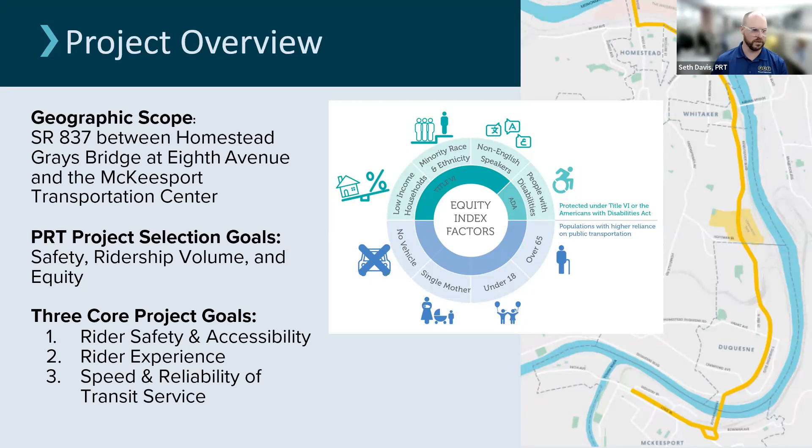So why are we all here to invest in transit on PA Route 837? Our NEXTransit long-range plan was adopted by the board in fall of 2021 and included 17 priority corridors. H2M is the first corridor planning project being implemented from a planning and future implementation perspective.

These proposed improvements will improve access to the downtown Pittsburgh to Oakland bus rapid transit corridor, which is coming online and beginning construction this fall. PA 837 also experiences one of the highest service delays in the Mon Valley, with over 7,500 transit riders through 8th Avenue in Homestead, demonstrating a high need and demand that already exists. This project will continue to support revitalization and development, not only on the 8th Avenue Business District, but across the corridor.

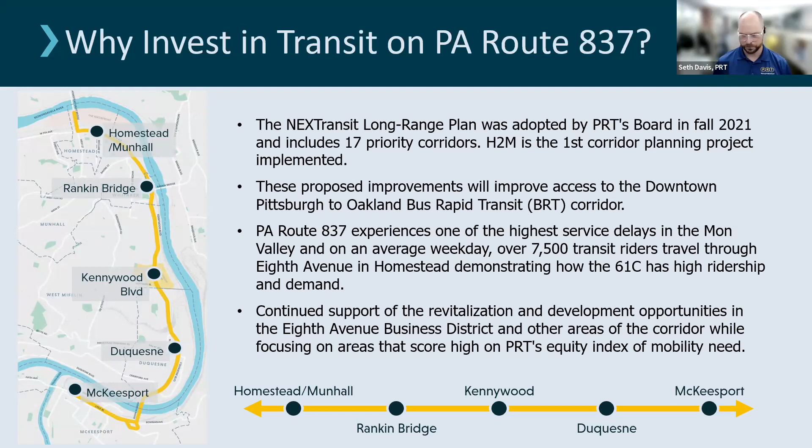So how did we get here? In fall of 2021, this was launched as an internal PRT project, with initial engagement around existing conditions and analysis. We brought that forward to a couple of public workshops to gain feedback on the corridor and desired improvements. Following that round of public engagement, we brought a consultant team on board to support the remaining stages of the project. In fall of 2022, there was significant data collection, modeling, and other elements, with initial corridor concepts developed.

So our approach to corridor planning: rider safety and accessibility, making it easier and safer for folks to access transit stops; improving our riders' experience, ensuring facilities in adjacent areas are more comfortable and attractive; and focusing on improving the speed and reliability of transit service.

This is a cycle that goes through an internal committee, works with our project partners, and comes to you as the public, as well as government officials, community members, and stakeholders, to refine this process.

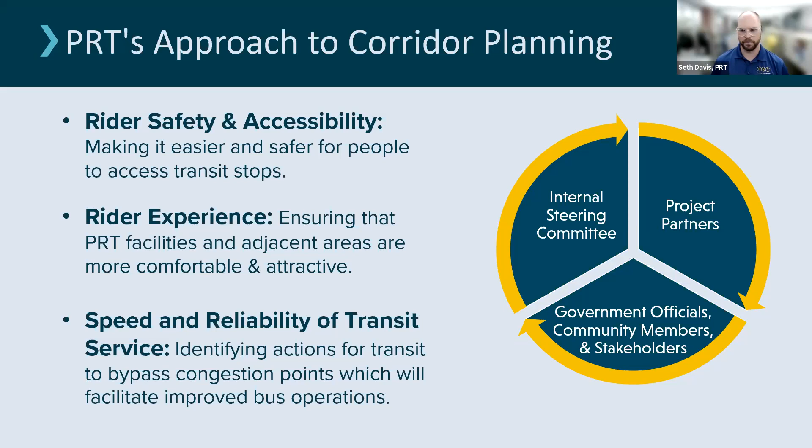There's been a long list of stakeholder engagement to date, starting with partner and community stakeholders back in fall of 2021, and several rounds of engagement internally, externally, with project partners, with community stakeholders, and most recently coming back to the project partners again. When we talk project partners, that's Allegheny County, PennDOT District 11, and the Southwestern Pennsylvania Commission, the Metropolitan Planning Organization for the region.

Just a quick touch on what happened previously in public meeting round 1, for those who participated in that round of public outreach. Some elements you'll see today will be familiar from that process, but the team has been working in the background with those who control the road segments in the corridor, to ensure any proposals you'll see today will be implementable and work with any changes they're making along the corridor.

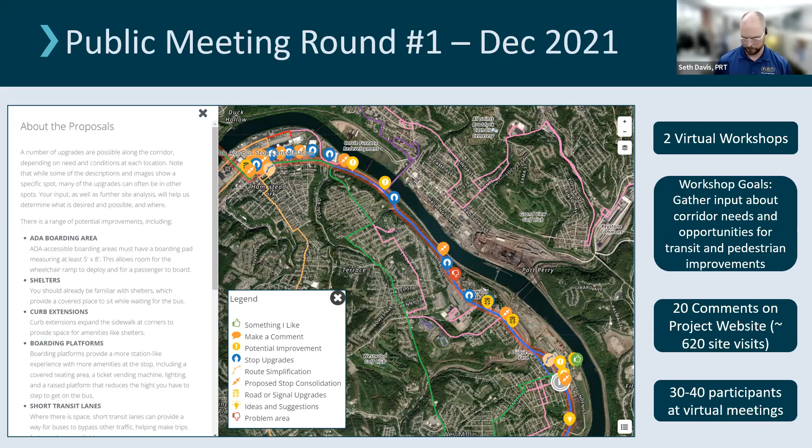As we step forward into some of the existing conditions and background analysis, we're also going to touch on opportunities for bus stop balancing in the corridor.

Existing transit in the H2M corridor area includes 5 key bus routes: the 61C, the P7, the 59, the 52L, and the 53L. There are also several routes that move through the waterfront area. While changes through this study aren't part of that scope, we know it's an important factor and destination for folks who may be using this corridor.

Typically there are 200 buses versus a 15,000 average daily traffic count on this corridor on 8th Avenue, so at any time about 10% of the people moving through the 8th Avenue business district are traveling via bus.

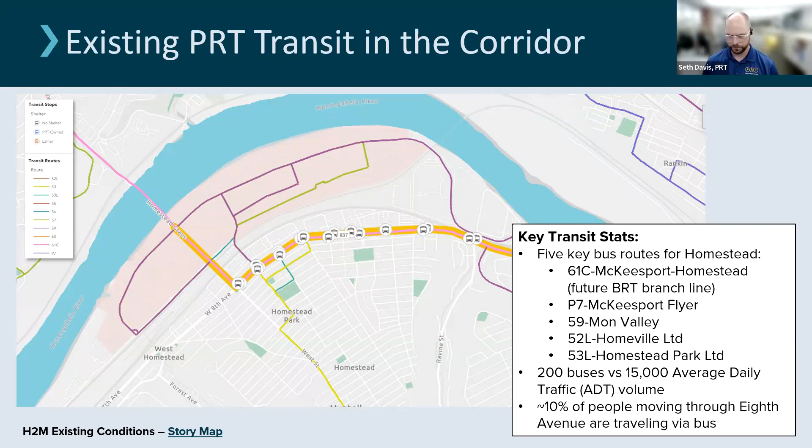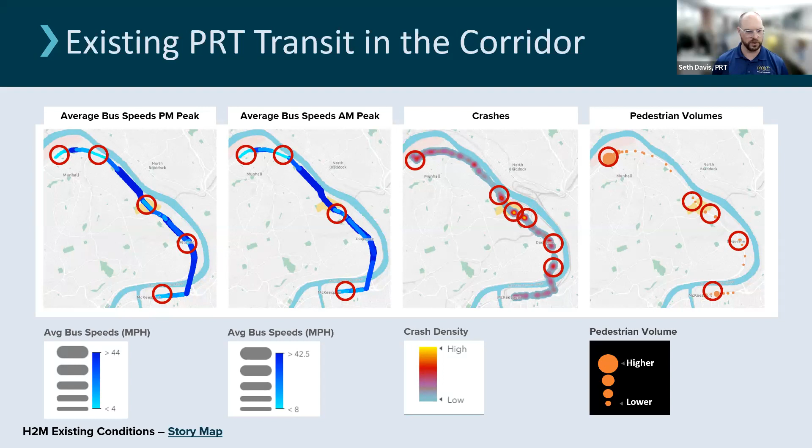Some of the existing conditions analysis the team talked about earlier is shown on screen here. We're looking at average bus speeds in the PM and AM peaks, and crashes and pedestrian volumes. There's a link on the site that shows this previous analysis, but what the team really started to see is several focus areas where speed is consistently impacted, while also seeing crashes and high pedestrian volumes—areas we want to dig into through the work of this study.

So just to touch on PRT's bus stop balancing process, why does PRT have a stop consolidation or balancing process? The overall goal is to balance the number of stops to improve a few different factors: on-time performance, reliability of the service, and the ability to focus rider amenities and overall experience around specific areas.

Through a multi-phased effort, typically we have a minimum of 600 feet between stops, and the corridor in some places shows we're hovering around 500 feet or even closer in certain areas. Several factors are included in terms of stop utilization, slope and topographical conditions, proximity to key community anchors. There are different guidelines on the screen here, and the table at the bottom has the breakdown of spacing across our different route conditions. That's how this team has applied those metrics to this corridor.

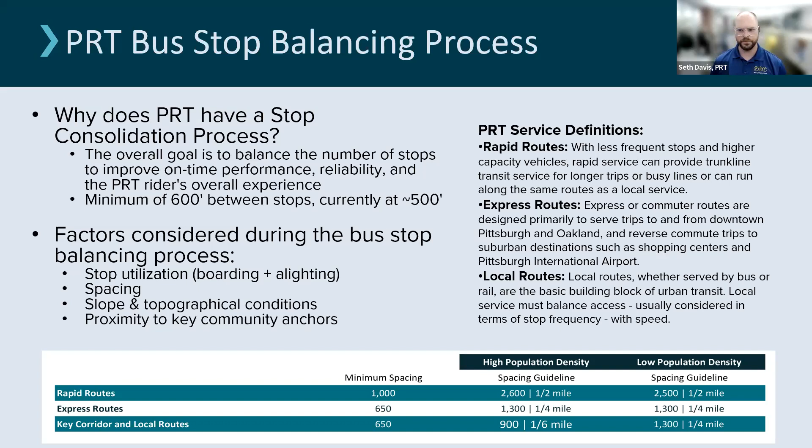But the importance we are bringing forward is to better serve riders' needs. There will be shelters, additional amenities, and recommendations for closing sidewalk gaps where possible, working with our stakeholders in the communities, as well as our project partners, to close those gaps before any of these consolidation or balancing recommendations are put forward.

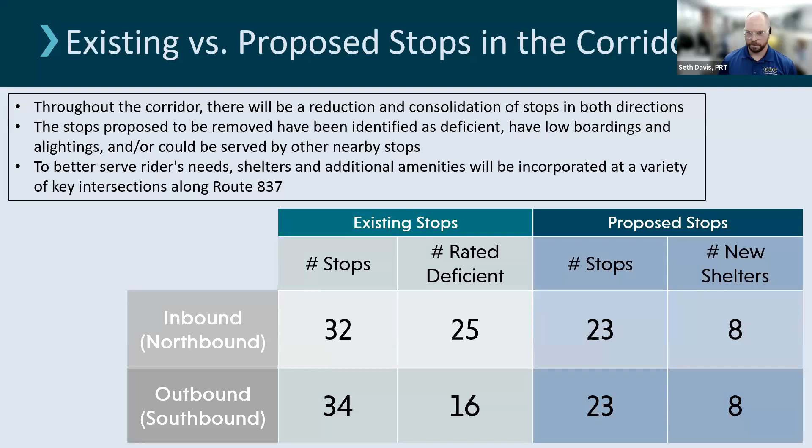Stepping forward, the area where you'll see some of the most bus stop balancing recommendations is the Homestead and Munhall area. 8th Avenue is relatively well connected from a sidewalk network. We know it's not perfect everywhere, but in Homestead and Munhall there's a pretty good sidewalk infrastructure and network before you start heading up the hill. The walk shed analysis shows good connectivity, so there are recommendations here to bring the stops into PRT's guidelines.

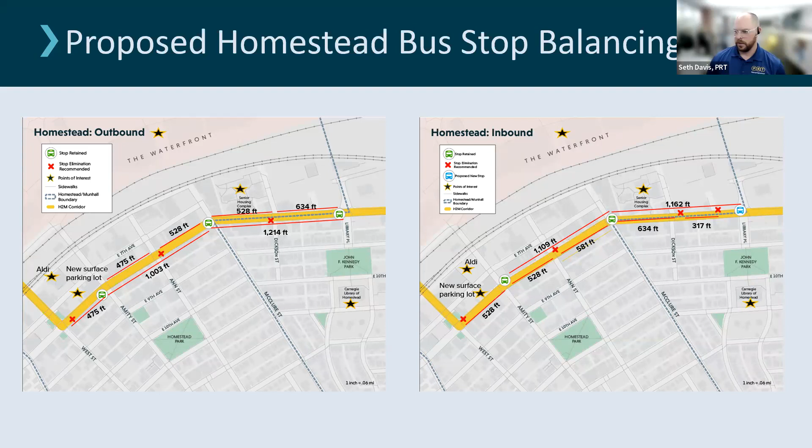But with those changes, we also want to bring forward amenity improvements in many of those locations. So if a few stop pairs are being removed and consolidated towards nearby adjacent stops, the largest shift to the nearest stop may be about 630 feet, but there is a closer stop in the other direction.

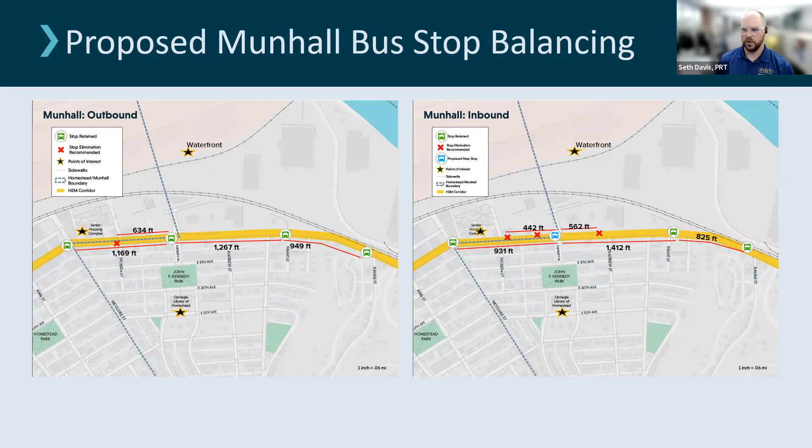Similarly in Munhall, there's a lot of crossover here with where Homestead and Munhall touch together, and similar recommendations apply, with the largest change again being only about 630 feet.

There's no recommended balancing right now in McKeesport other than a small adjustment, and we'll touch on why things aren't changing on Lysle Boulevard more significantly later in the presentation. Just want to highlight there is one stop location being proposed to have a minor adjustment, and we'll get into those details going forward.

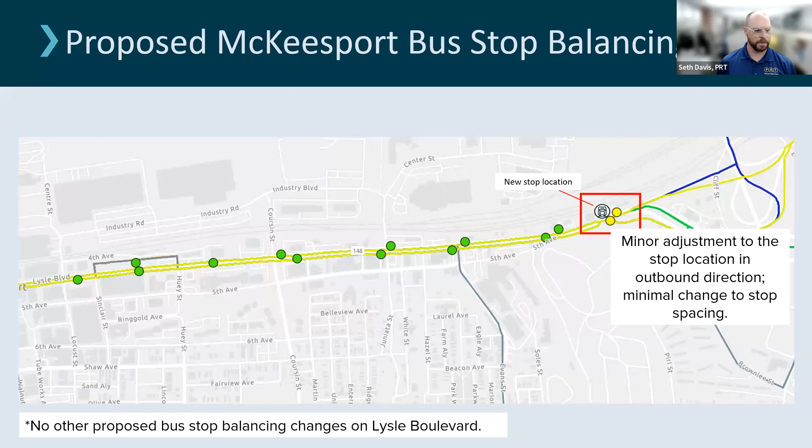Before we step into the key intersection improvement opportunities, Serene, I just want to see if there are any comments we need to address before we jump into the intersection improvements.

Yes, thanks Seth. There was a question about the 53L and possible service improvements along the corridor for that one, and the 61C, from Joy Door. Those are great questions, and PRT has just launched the network redesign study. This project isn't undertaking any routing changes or service improvements at this time, but your question will be sent to the team at PRT undertaking those routing considerations as part of the network redesign. I'll emphasize that we are focused on this corridor as it will remain important not only today, but in the future with the network redesign as well.

One more question, I think, on a comment that came up, and I think you'll highlight it in this next section: sidewalks adjacent to the bus stops, and how that's something that limits accessibility to seniors and riders with disabilities.

I think that's certainly well understood, and there will be improvements. This project is taking these concepts to what would be known as a 10% design level, and after these concepts are confirmed or we make adjustments and changes, we're really going to move towards implementation. That will include analyzing the nearest sidewalk infrastructure, analyzing some of those existing crosswalk conditions, as well as making recommended improvements, so that'll be forthcoming.

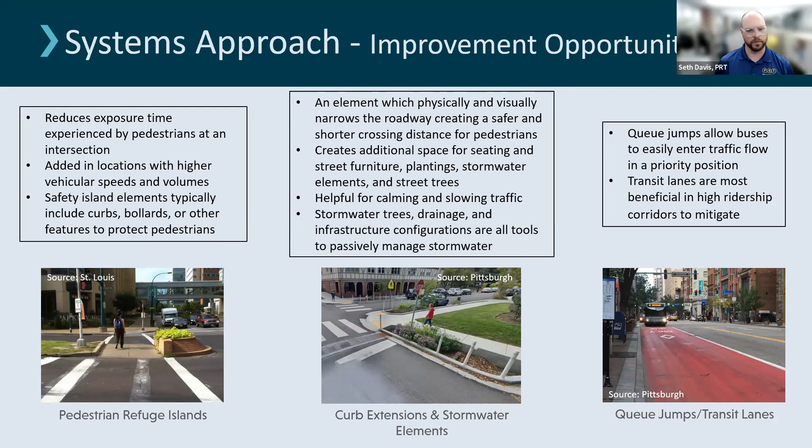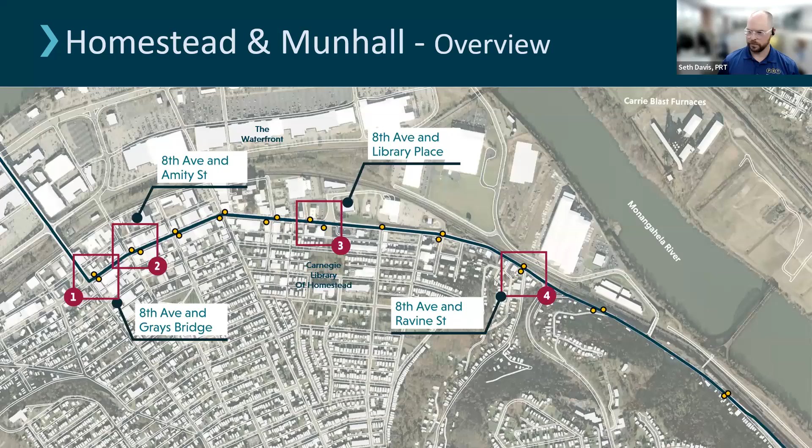Stepping into the area at the base of the Homestead Grays Bridge and West Street, the existing conditions right now—if you went out there today, a lot of the pavement markings aren't really visible. There's other signage and elements that aren't visible either, and it has a large set of crossing distances for folks trying to navigate this intersection. There's a crossing underneath the back of the bridge that forces folks off 8th Avenue to move toward the bridge and underneath it.

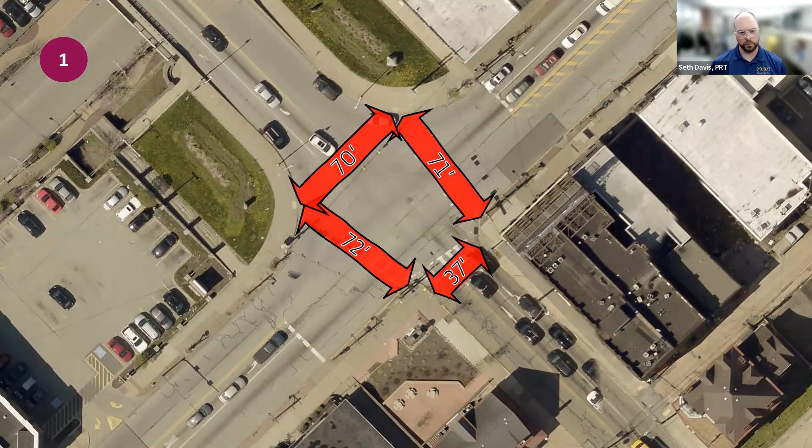That isn't the most comfortable crossing, and what was observed in the field is that a lot of people are still crossing at these pretty wide intersections. So the intent of the proposal is to step back, reduce those crossing distances, and focus on giving people a more comfortable crossing and safer spaces to get across the intersection.

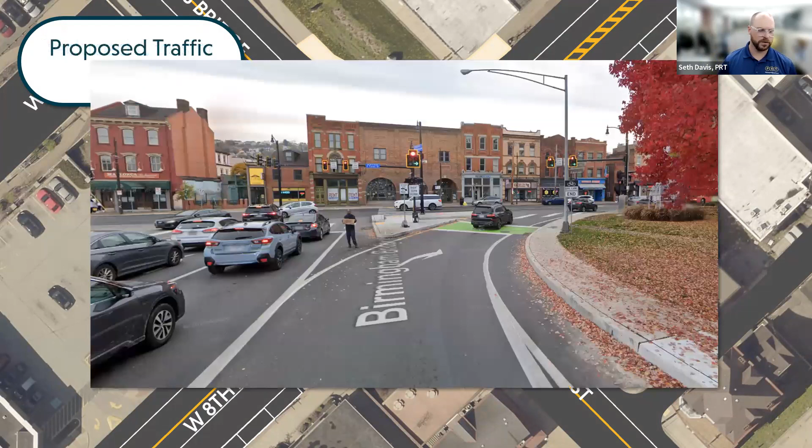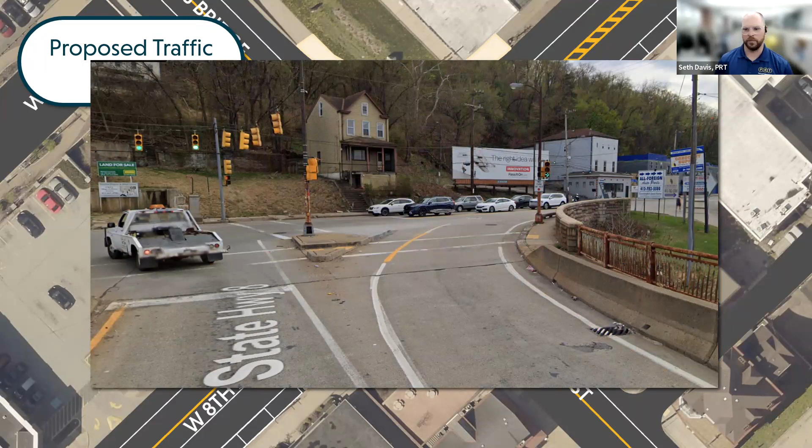This may look familiar to folks who have been in the East Carson Street area with the newly renovated portion at the base of the Birmingham Bridge, and even further back, something similar seen at the 62nd Street Bridge in Lawrenceville and Butler Street. The intent is to control these different movements that already happen today—not restrict any of them—but control them so there are protected crossing phases for pedestrians and more consistent movement for folks coming through the intersection.

This is a PennDOT truck route, so all existing truck traffic will continue to be accommodated, as well as our larger buses, known as articulated or 60-foot buses.

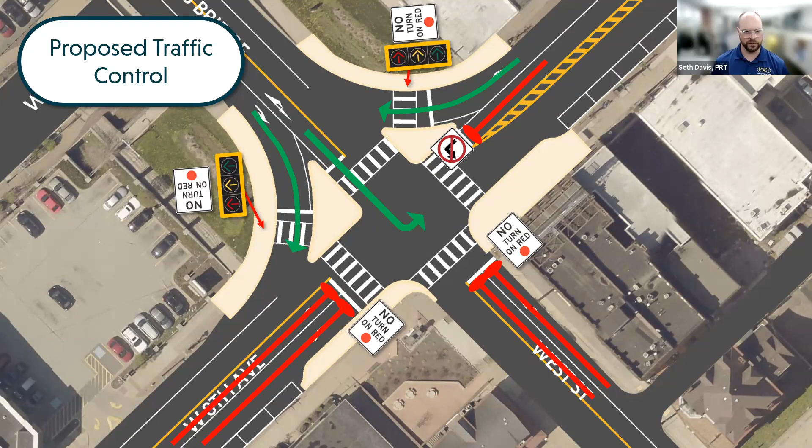Stepping in and looking at it all at once, this reconstructed intersection will focus on improving pedestrian safety and overall traffic flow. Some of that will happen via shorter crossing distances, but also shorter signal cycles. The existing bus stops will be relocated or shifted to Amity Street, which we'll step forward to in the next slide.

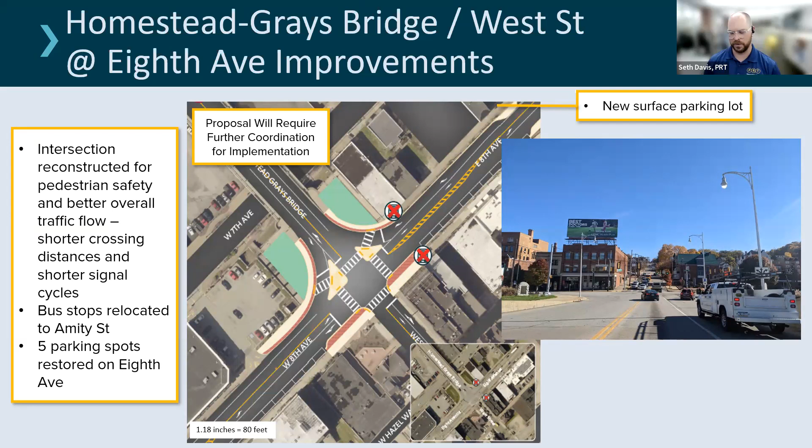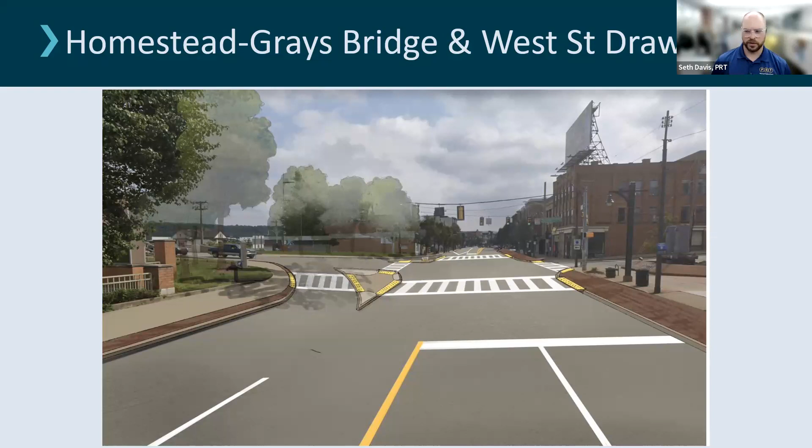This is just a rendering of what this may look like on the ground, showing some of these refuge island areas and crossing areas, and we'll continue to take that forward and evolve it as the design is tweaked.

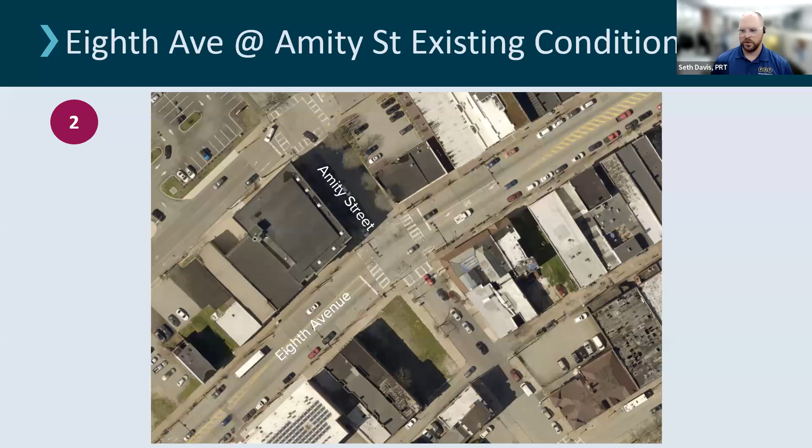I want to step into this next one because these intersections will work together—this is at 8th Avenue and Amity Street, the existing conditions. The framework is a little tighter. You can see the crossing markings, but what the team is recommending is consideration of a fully upgraded intersection that includes what we're calling queue jump lanes.

What happens at the existing intersection at the base of the Homestead Grays Bridge and West Street is that often our buses aren't able to curb, or choose not to curb, to serve ADA folks who may need a ramp or those using a mobility device.

Often if our bus stays in lane and away from the curb, they can't deploy that ramp and folks may not be able to access it. There's a combination of factors at play here where the operators don't have a desire to curb because they can't get back into traffic, or they get caught in traffic affecting their running time or affecting reliability of the route.

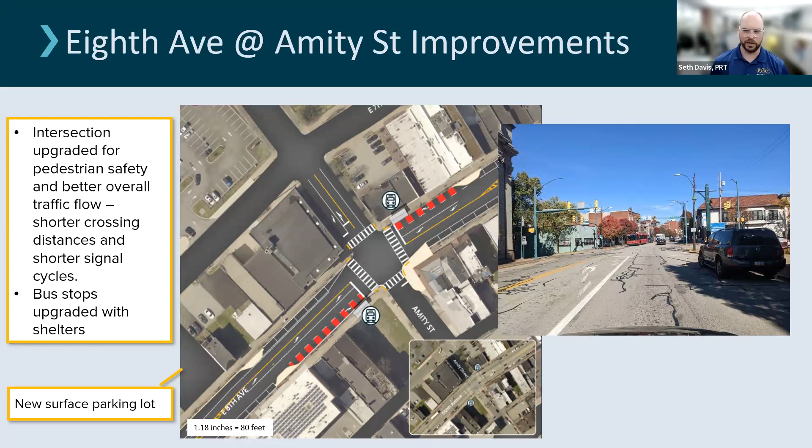What this balancing or consolidation of stops here at 8th and Amity intends to do is allow consistent curbing, allow space for the buses to move out of general traffic and get to the curb and have that dedicated space. It'll also be paired with some signal improvements to allow them to get back into general traffic, or queue jump around the queue, and keep moving down the route in both directions.

Just looking at it overall, the distance for some may not be significant, but there are elements here at play and the intersections will work together. The Homestead Grays Bridge has a future rehab that will be led by the county. This intersection is going to require a lot of collaboration with the county and our project partners, and we've already held discussions with them and highlighted the initial concepts that you'll see today.

Continuing forward, I think this is a timely prompt. 8th Avenue accessible signals would be included and upgraded to include elements for the blind and some auditory measurements, but that'll come further in the implementation and financing plan.

I also saw a question about 8th Avenue at Library Place as well as William Marks Drive. This existing intersection is really representative of what may have happened if the waterfront was continued developed, or if there was a secondary entrance to the waterfront district identified. What this street design or geometry represents is a much higher volume of traffic in different movements, with the slip lanes and different turning movements.

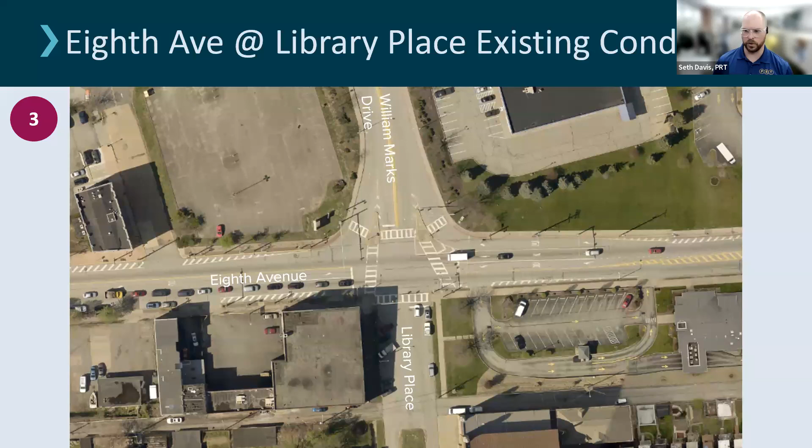That really hasn't been shown through the modeling, field observations, or traffic counts to need that level of geometry or capacity. So the team is recommending tightening up the intersection to be more straightforward, with more typical movements based on the volume, and infilling behind it with either green space or other elements. This gives a more straightforward sidewalk presence and design, and brings our bus pairs together in a closer nature than they are right now.

The bus stop, especially on the inbound side, really sits far back from this intersection, because of the nature and design of the slip lanes and other elements here. So what this is intended to do is bring those pairs together, infill the space, accommodate our riders in a more typical fashion, and give closer access to where people want to be, or where we understand there's some desire to be closer to different points of interest on this corridor.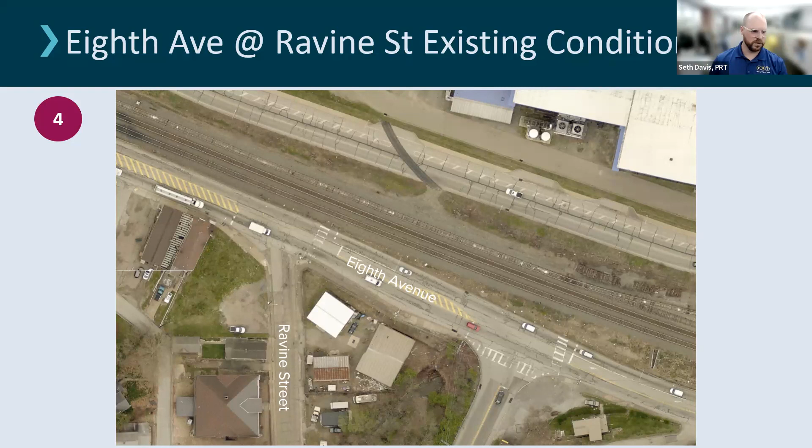So what the team is recommending is changing some of the geometry there, shifting the inbound stop to an area with a little more right-of-way space, so there can actually be a sidewalk stub, shelter, and other elements. This gets a much safer pairing of stops, and also involves adjusting some of the road infrastructure to calm traffic and reduce some of those faster turning movements in this location.

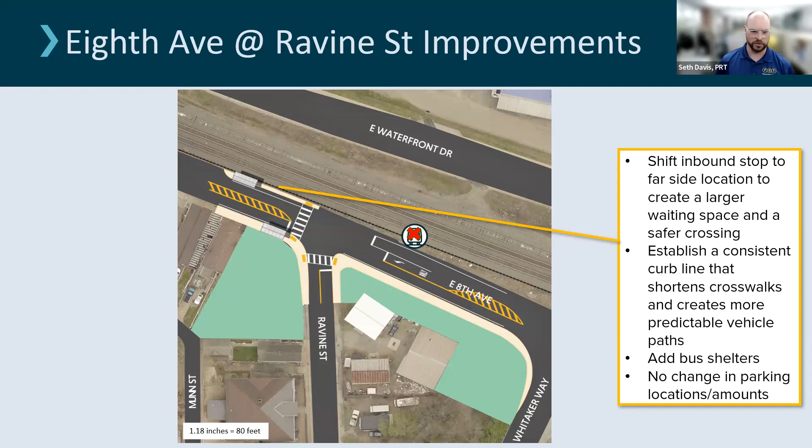Before we step forward, I want to give folks an opportunity—Serene, if there's anything highlighted in the chat—we want to know if there's anything else happening in this segment that PRT needs to know about. I've seen a couple items come through the chat, but also any specific concerns or additional considerations about the proposed improvements. We will be addressing many of the comments we've seen in the chat, but we want to know if you use these stops right now, and if you do, what other elements would improve your transit experience in this portion of the corridor.

I think one question that came up in the chat was about traffic calming and speed limits throughout the corridor, but if we can address it specifically in this section. The right-of-way, while it falls in Homestead, Munhall, and others, is a PennDOT right-of-way. So often they control some of the signing of speed, but what we're recommending will assist in some of those traffic calming programs.

So I saw a question about radar. It's not permitted by the state in terms of allowing local municipalities to use radar, but we're focusing on a more engineering perspective, because enforcement or radar enforcement isn't consistent unless automated. Engineering and changing the roadway infrastructure is much better from a traffic calming perspective. So what we're showing today should fall in line with those proposals for some traffic calming, and we're going to keep working forward with PennDOT and the municipalities to confirm those elements. And should all of these things be implemented going forward, there may be an opportunity for signage or speed limit changes.

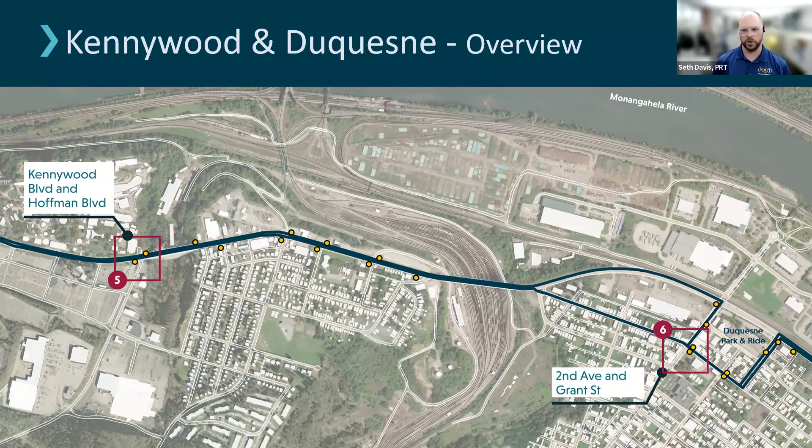So moving forward, we're calling this sort of the Kennywood and Duquesne segment of the corridor. What you see here is we have two highlights known as the number 5 and number 6 key concept, here at Kennywood Boulevard and Hoffman Boulevard, right on the edge of West Mifflin and Duquesne, and then also 2nd Avenue and Grant Street within Duquesne. We know there's other opportunities in this segment, and certainly if there's areas that you'd like to highlight, drop them in the chat or ask a question, and we'll continue to analyze portions of this segment.

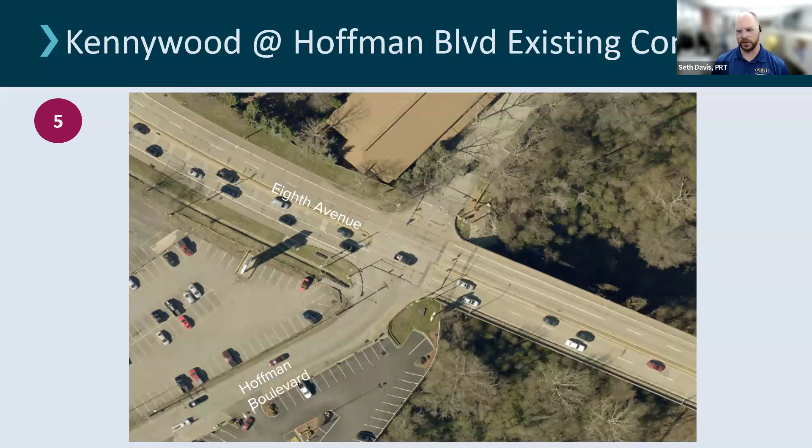Stepping into the first one, this is the part of 8th Avenue that's known as Kennywood Boulevard and Hoffman Boulevard. This is the existing infrastructure and geometry of the site. Just for full disclosure, when Kennywood is open, the PRT bus route 61C services within Kennywood's parking lot, closer to the entrance here. What you'll see in recommendations is actually for PRT to bring the bus stops to PA837, or Kennywood Boulevard, year round. This is going to need further coordination with Kennywood as well as project partners to make this work for all parties as well as the public.

We know this shift is a major change from what currently happens, but part of that change and unknown with the bus servicing internal to Kennywood really provides some conflicts for our riders, and also really impacts operations when our buses get caught up in that general traffic infrastructure, especially at closing. Our buses are losing a lot of time and really impacting ridership reliability for folks accessing transit.

So with this proposal, there will be other considerations, and I'll touch on it in a future slide, but what this will do is bring the inbound and outbound stops to a year-round location on PA837. There's going to be an opportunity for sidewalk extensions, sidewalk improvements, as well as some other considerations for shelter and amenities in these areas.

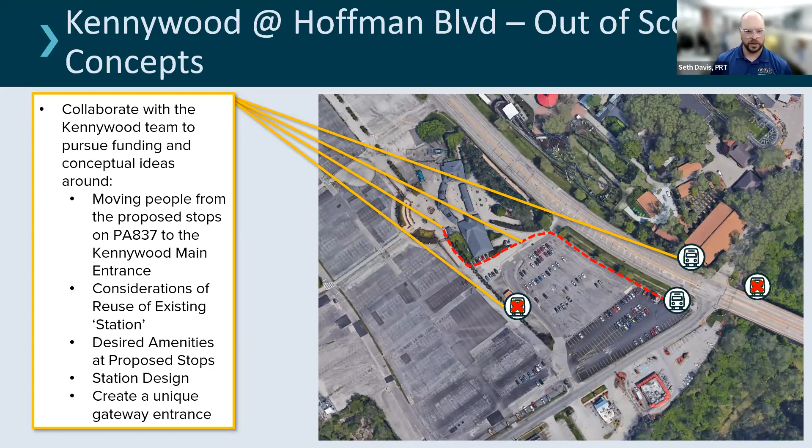I do see a comment from Dave Totten regarding the curb extension at Hoffman rather than a queue jump lane. Hearing what criteria is proposed, this is an element we're going to work with and confirm. Dave, we can talk about it in more detail going forward.

And yes, Joy highlights the Giant Eagle and restaurants. Once again, PRT doesn't control the ability for or construction of sidewalks on Hoffman Boulevard, but we do want to recommend to West Mifflin and others that control the right of way or construction of sidewalks. These are important, critical connections, especially for those accessing the 61C, to make that connection to areas transit riders are trying to access.

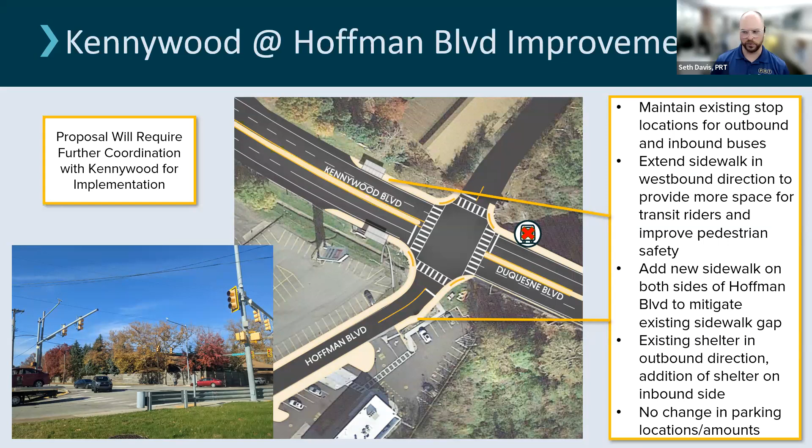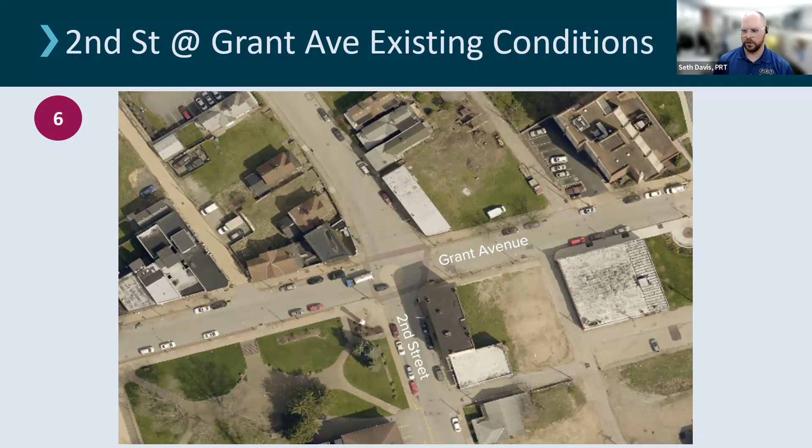Continuing forward into Duquesne—we can come back, and I do want to give folks time for questions—but this is at 2nd Street and Grant Avenue, the existing conditions. What will be proposed here is a shifting or balancing of stops to be consolidated, so that if you're making a transfer and accessing a different route, you know where you'll board the bus in either direction, with a consolidated outbound stop, extended curbs, improved sidewalk striping, and potentially a raised crossing.

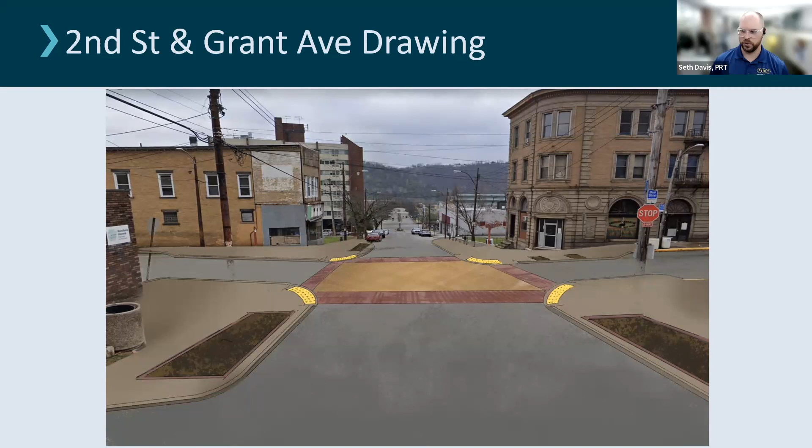I'll step to the next slide because it's a little easier to see what'll be happening here. We want to work with Duquesne to confirm desires or any changes they're making in the street geometry, but just provide a better overall rider experience at this stop or these sets of stops.

I think there's been a couple questions in the chat, but I don't know if there's anything I missed, Serene, before we step into the next segment. Nope, I think you covered most of them.

Once again, if there are folks in these areas not only living but accessing them typically, we're happy to answer specific questions, but we do want to know if you're using these stops, and if there's items we've missed where you feel they'll highlight improvements, please let us know. We know there's a lot of changes or potential changes we may have missed that we're not aware of currently.

I do want to highlight our Duquesne Park and Ride sits within this segment, and there's future opportunity to analyze usage, but also changes that could happen there from a transit-oriented design perspective. Right now there may be other changes updated in Duquesne, but there'll be similar treatments to what you saw at 2nd Street and Grant Avenue.

We would like direct connection with Duquesne. We hadn't had an opportunity, or I know they've had a lot of change in staff, so we're happy to work with Duquesne to confirm some of their ideas. We've referenced some of the comprehensive planning that has happened in Duquesne, jointly with McKeesport, but we will keep working forward with that.

Certainly, here, well heard, Nicole. There are several stops that need upgrades, benches, and shelters, and that's part of an overall analysis, so thank you for that comment.

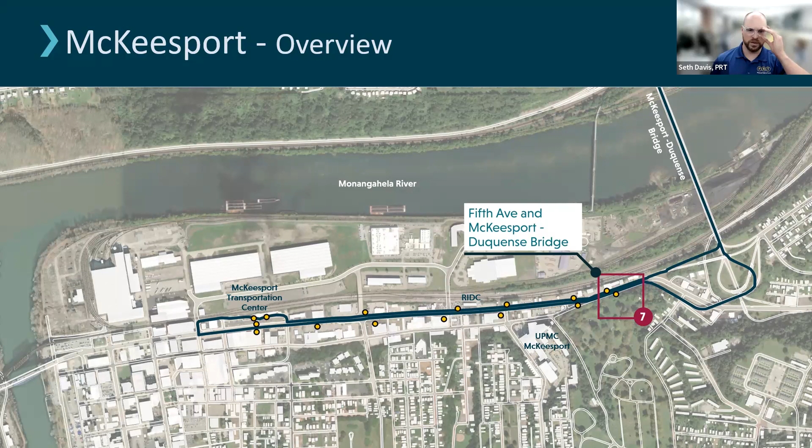That's at the Fifth Avenue area near the McKeesport-Duquesne Bridge, where a lot of the ramp infrastructure is going on, where the 61C accesses the ramp infrastructure to get onto the other side of the river. So what's being proposed here will require some consistent further coordination.

What we're proposing is a pedestrian actuated traffic signal where the bus would be able to service the stop in either direction moving past the crosswalk. A rider or somebody accessing the stop would be able to go towards the back of the bus, actuate a button, press it to cross, and make a red light for traffic happening here. Four lanes of traffic can at times be very fast.

This is one of the last stops in McKeesport heading inbound that folks can access a 61C service going all the way to downtown on a one-seat ride.

Just off the screen here, there are several housing buildings through the McKeesport Housing Authority and others, where it is difficult to access this stop because of the ramp infrastructure and the topographical changes here. So what's being proposed is an extension of a sidewalk and identifying an accessible path from Pirl Street, because it is difficult currently to get from Pirl Street to the stop, but we're going to work with our partners, and the ramp infrastructure is definitely a barrier for the 61C.

In a perfect world, we'd be able to route the 61C closer to these locations, but that same ramp infrastructure that's a barrier is also difficult for our bus to get off of, access the housing areas, and get back on without a significant loss of time for those going the whole ride from the McKeesport Transportation Center all the way to downtown.

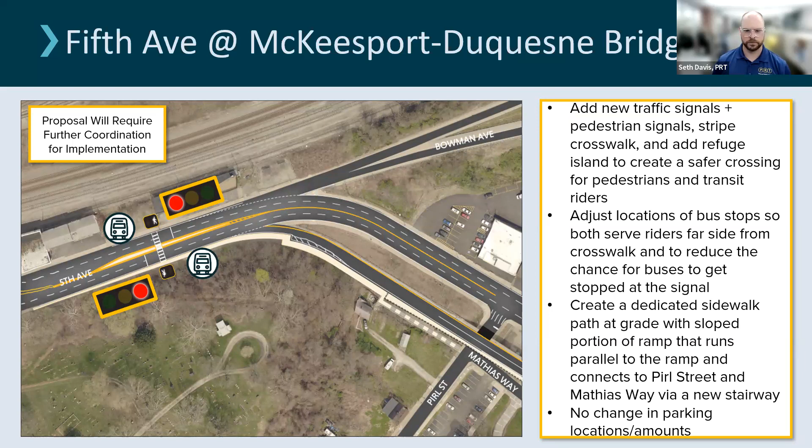All right, so I do want to highlight a couple potential future projects. There's one I touched on earlier, a Rankin Bridge future rehab going on with the county coming down the pipe, but there's also an opportunity on Lysle Boulevard for a road diet or other reimagining of McKeesport's Lysle Boulevard. So I talked about some traffic modeling that happened early on in the project.

Everything was analyzed from an existing traffic flow standpoint, and any of the improvements or recommendations you've seen today either improve or do not change the existing traffic flow, or what PennDOT likes to see in terms of level of service. What the team analyzed was that McKeesport's Lysle Boulevard would be considered to have excess capacity from a number of lanes, from speeds, from a lot of different factors here.

So there's an opportunity for reimagining Lysle Boulevard to be more transit supportive, more pedestrian supportive, as well as provide some amenities there in terms of changing over from future development. We know McKeesport's working on a couple demolition projects that are hopefully setting themselves up for future development.

So we're going to continue working with McKeesport as well as any other partners in the area to think about how we fund a study focused specifically on Lysle Boulevard, but also partner with the team pursuing active transportation updates in this area. Active transportation usually refers to folks who may be walking, using mobility devices or bikes, or other means other than vehicular travel.

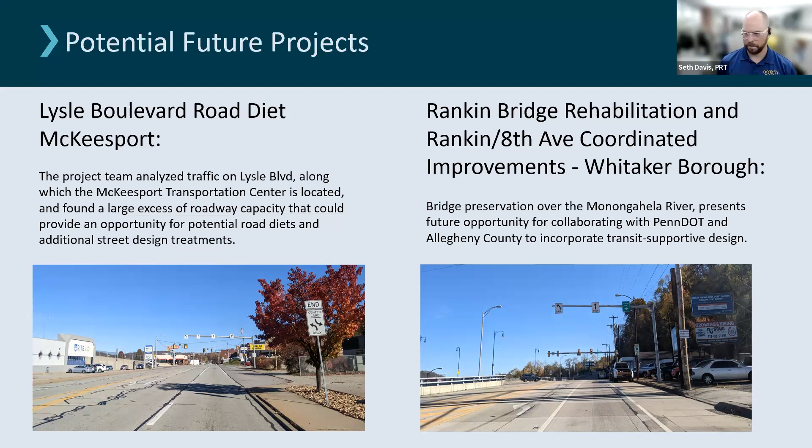So I know I think I'm going to keep touching on future projects, but if I didn't see any specific comments come up, once again, please raise your hand if there's something specific you would want to talk about in McKeesport, but I'm going to keep moving forward if I don't hear anything else.

Serena, is there anything I missed? No, overall, I think support for the Fifth Ave location that you shared, and the needed pedestrian improvements there, and some continued comments from Joy about just making sure we reach city and Hazelwood residents, through the public meetings. We'll make sure there's going to be, I'll touch on some opportunities for pop-ups going forward, but we'll certainly push this out and be more prescriptive in where we're looking at these items.

So next steps and future, as I highlighted the timeline, I want to highlight it again. We're here in the summer and fall of 2023. This is a project that's been long on PRT's work plan and also internal work plan, but we're closing up this round, which is only going to take parts of this project to what would be known as a 10% engineering design. We know there's a lot more work to gain additional funding and additional support, but we're going to continue to work with our stakeholders, continue to gain public feedback, and come back with an implementation plan later this fall and later this winter.

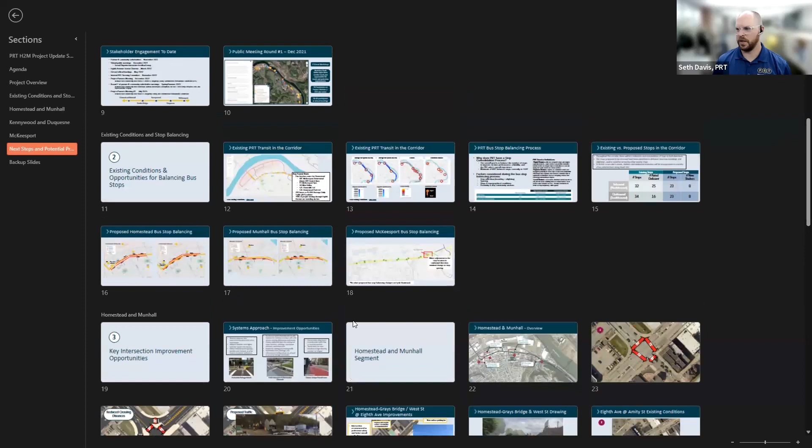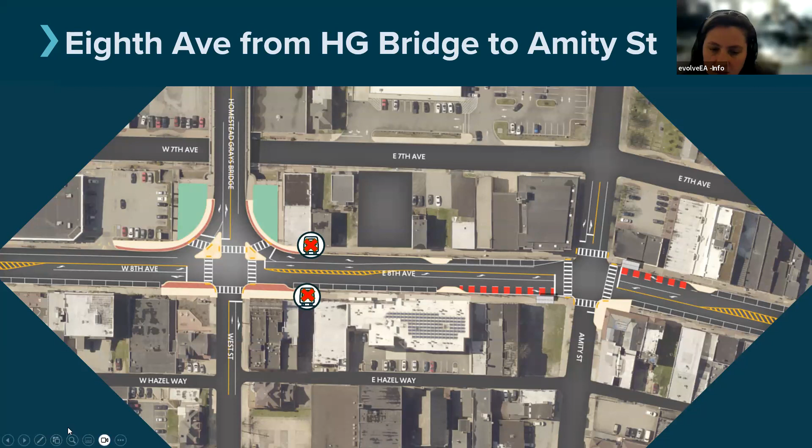Thanks, Seth. Another question from Nicole Gallagher: curious about the timeline. When can we actually expect to see the improvements? You mentioned winter of 2023 — is that when we might see some of these improvements start to happen?

I don't want to keep kicking the can down the road, but there are things from a signal timing perspective that could potentially happen sooner, like extending pedestrian crossing cycles or changing how the cycles work right now. Recommendations on how to do that will come out this fall and winter as part of an implementation plan. Then we'll immediately and actively, even right now, begin working with Homestead or Munhall or anybody else that is a signal owner to begin implementing those changes.

If it's deemed from initial analysis that the whole signal needs to be upgraded, that's where part of the implementation plan will identify things like Green Light Go, which is a state funding program for signal improvements, or other funding elements that'll be drawn out. So things could come online within the next year or two, but the harder built infrastructure will take time to work with PennDOT for highway occupancy permits and other elements. We'd like to see them today, but there's going to be a variety and priority in terms of implementation phasing coming out.

So more to come, and we'll try to get more details on that as we go forward with the project.